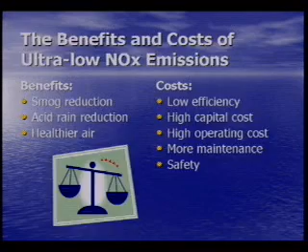We'd like to look at some general categories of the types of ultra-low emission burner systems that are available today. The first are massive FGR burners. What we mean by that is these systems recirculate a very high percentage of the stack gas back through the combustion zone in an attempt to control NOx.

The second major category we're going to look at are matrix burners. These are burners where the fuel and air is premixed at one point and fed through usually a long cylindrical porous matrix material.

The next one we want to look at is post-combustion treatment, which does not involve burner design, but merely is taking care of or eliminating NOx that's already been created on the back end of a boiler system.

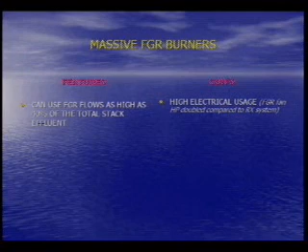One other drawback of recirculating high amounts of FGR is that the flame tends to become rather translucent when you're recirculating these products of combustion back through the flame. The translucency can create a couple of problems. One, it reduces your radiant heat transfer through the furnace into the boiler, and also it makes it a bit more difficult to use standard equipment for detecting the flame, because the radiant energy, particularly the ultraviolet energy, is diminished considerably.

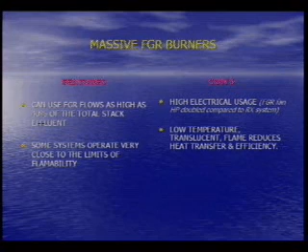Some of these systems that operate with large amounts of FGR will operate with staged combustion, and by that we mean you're burning a rich fuel-air mixture in one area and a lean fuel-air mixture in another area, which is fine. It's a good approach, but some of these systems that are trying to approach or have approached single-digit NOx emissions levels have run into some problems.

Other systems take a different approach, and rather than staging the combustion and operating very rich in some areas and very lean in other areas, they attempt to develop a near perfect mixing situation with the fuel and the air. The theory behind that is to avoid having any excess oxygen molecules exposed to the fuel.

Combustion instability has been a problem with these systems, particularly the staged combustion systems. When you're operating very close to the limits of flammability of the fuel, and then in addition you're adding FGR to slow down the combustion and lower the flame temperature, it's a very tricky concept, and things can go awry.

As a result, what these people have found is that it's been necessary to slow down what we term the modulating rate, which is the amount of time it takes to modulate the fuel input between the minimum and maximum values of the system.

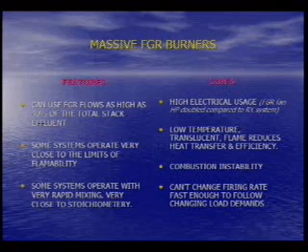The problem with that is the load demands on boilers obviously vary, and in fact the San Joaquin Air Quality Management District, last September when they came out with their new regulations, specifically relaxed requirements for load following boilers for this very reason, because these particular systems cannot change firing rate fast enough without getting unstable and unsafe. On these, now termed load following boilers, the emissions requirements have been relaxed somewhat.

Okay, a brief look at some of the pros and drawbacks of these porous matrix burners. As I mentioned, these types of systems pre-mix the fuel and air at one point, and then feed it through this matrix material.

There's several different types of materials. We say delicate and expensive because some of them are quite delicate. They're ceramic materials, and they can break quite easily, and they're not cheap at all. The purpose of these matrix materials is that there are little pores through them, and this fuel-air mixture is forced through these pores. The actual combustion takes place on the surface of this material.

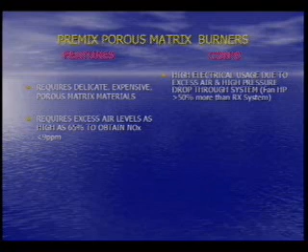And what's the drawback of all this? Well, here again, high electrical usage. You've got two problems here. If you're moving 65% more air than what's required for combustion, obviously your fan requirements are going to go up, and the horsepower requirement is going to increase considerably. And also you have to force this fuel-air mixture through these little pores in the matrix material, so the pressure requirements, and thusly the fan requirements, are increased as well.

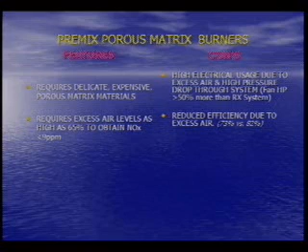We've run some tests on these types of systems, in fact at the same plant for this project. And what we found was that the efficiency of these porous matrix systems that were in operation in this plant was running at 73%, as opposed to the 82% for the equipment that we put in for this project. That's a 12% additional fuel requirement that the customer has to purchase and burn for the same amount of output on the boiler.

For this particular boiler involved in this project, which was 500 horsepower, at this plant which operates 24/7 at an average of about 60 to 65% of its maximum capacity over the last year, this difference in efficiency equates to more than $70,000 a year in fuel costs just for one boiler for this plant, and they've got 5 boilers. So a significant factor that we really want to address in this new technology.

Also, because this matrix material has these small pores, they can easily become contaminated and plugged with any particulate matter that's in the combustion air. Might not sound like such a drawback, but if you talk to customers who have to change many filters on their combustion air fans every week — and if you don't do it, you're going to have a real big problem — it is a maintenance problem.

Also, the durability of this matrix material is somewhat questionable. There are different types of materials. As I mentioned, there's some ceramic matrix materials. There's also some, I wouldn't say exotic, but stainless matrix materials that are available. But the lifespan of these things is limited, with the combustion taking place right on the surface of this material.

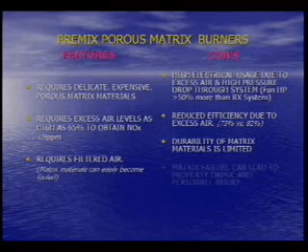Now, if this material does fail, it can present a real large safety issue, mainly because, once again, you're mixing the fuel and air at one point, and actually combusting it at a different place. In order for that system to work safely, the velocity of this fuel-air mixture being fed to the flame has to be higher than the rate of flame propagation coming back towards the mixing point. What happens is, if this matrix material fails, the velocity of the fuel-air mixture going towards the flame front drops drastically, and the flame front comes back to the mixing point. So that's one of the safety issues we wanted to address in this project.

Also, these types of systems have a rather limited turn-down ratio, turn-down being the ratio of the maximum input of the system to the minimum input. Typically 3-to-1 is about all you get out of one of these porous matrix systems. In the testing we did, we were able to get a 5.5-to-1 turn down, a little bit less than our goal, and we feel there were some problems associated with this specific installation which led to that. We were actually shooting for 6-to-1, and we believe that can very easily be done with a few minor changes in that installation, or in future installations, I should say.

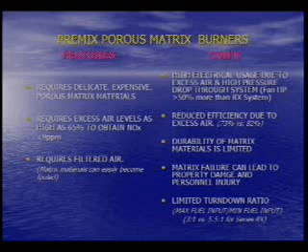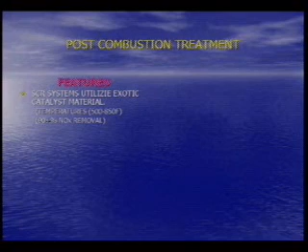SNCR systems, selective non-catalytic reduction. No catalyst, but still a chemical injection. These operate at much higher temperatures. They're not nearly as efficient at removing NOx. And I'd like to note that this 50% removal rate shown here is

only if you can withstand a relatively high amount of what's called ammonia slip or chemical slip. That would be the chemical that's being injected to reduce the NOx not being controlled properly or not mixed properly with the effluent, so you get what they call slippage, and a certain percentage of this chemical goes up the stack along with the flue gas.

Now, some of these systems, if you need to limit your ammonia slip to several parts per million, may only be closer to 30% effective at NOx removal.

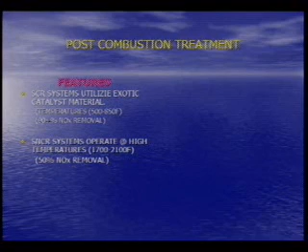Some of the chemicals that can be used: ammonia is the most common, sodium hydroxide or urea, or a couple of others that you can run into.

Now, what we feel are some of the drawbacks here. The biggest one is the cost. Extremely expensive systems, very, very expensive. Not only for the equipment itself, but the constant operation and cost of the chemicals, et cetera, particularly if there's a catalyst involved, which has a limited lifetime.

Some of these things can also result in chemical waste streams, which need to be dealt with. Certainly would rather not have to deal with that if we can get away with it.

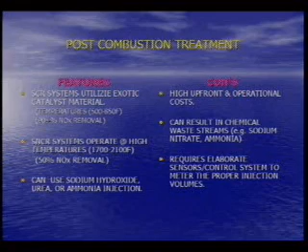Now, in order to control the exact amount of chemical that is injected into the flue gas, there's some rather elaborate sensors and control systems that are required to do this, and this is one of the reasons why the cost is extremely high on these systems.

So our goal in this project is to minimize these costs as much as we can and still maintain these benefits that we talked about a short time ago.

We want to increase the efficiency. We want to lower the cost to industry to make these benefits of low NOx a little bit more palatable as far as the cost is concerned.

We want to improve the reliability of the equipment, and that relates back to catalytic beds that need to be replaced, and matrix materials that may fail and need to be replaced.

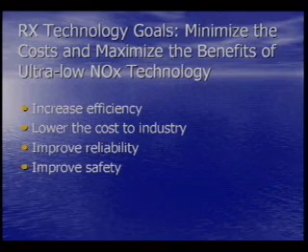And, of course, the safety, which we touched on earlier with the unstable combustion conditions and also with this matrix failure.

Now, on the efficiency side of things, what we found is that we could operate this new burner design optimally with 3% oxygen. We have actually operated at much less than that, down to 1.5% oxygen, but 3% is considered kind of optimal as far as industry is concerned, because you still have to deal with humidity changes, temperature changes, and whatnot, and operating down at 1.5 or 2% oxygen is cutting it a little too close.

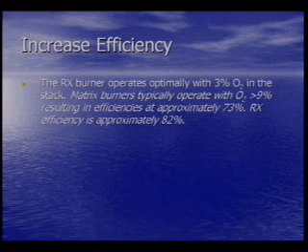But at any rate, we kind of touched on this efficiency thing before and what it can mean to industry. And here again, under these conditions at this host site, more than $70,000 a year just in one boiler to put up with this excess air that is required on some of these matrix burners.

One of our other goals in this project was not just to reduce NOx that we had already made, but to greatly reduce the production of it in the first place, rather than just putting a Band-Aid on the back end. By producing less in the first place, it makes it a lot easier for us to get the final result down even lower at a lower cost.

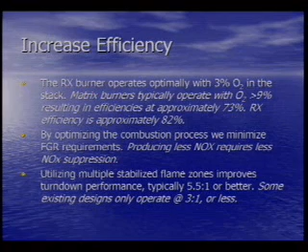Now, we're going to take a look at just exactly what this looks like mechanically in a little bit more detail here, but it involves some multiple flame zones. We are actually operating with 5 different flames in what we call 3 different combustion zones in the system, which we feel gives us a lot more stability and gives us this higher turn down ratio.

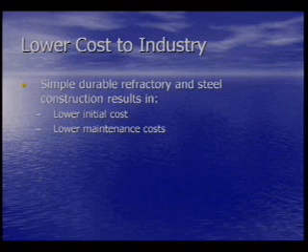And also eliminating, what we're going to get into in a little bit here, the formation rather than just dealing with thermal NOx, which most systems deal with. We felt we could lower the cost to industry on these systems by getting away from some of these exotic and very expensive materials, and of course any chemicals that are required for post-combustion treatment.

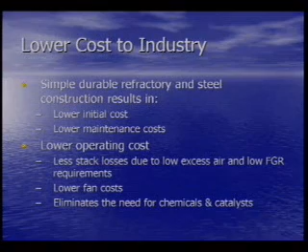Also, the operating costs - we talked about the stack losses. This relates back to the amount of excess air and the O2 levels in the stack, 9% as opposed to 3%, which is considerably more expensive to operate with all this excess air. And also the electrical costs to operate with very high FGR rates on these massive FGR burners.

Now we're going to take a look at some numbers here. These were put together by Altex Technologies several years ago, which represent the cost to remove 1 ton of NOx. This is for initial equipment cost and operating costs over a 10-year period. And as you can see, way up on top, post-combustion treatment is just extremely expensive, almost 100 times as much as what we feel we're going to be able to do this at.

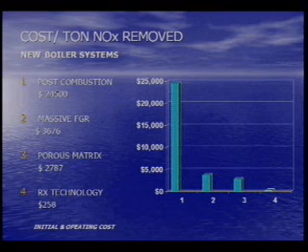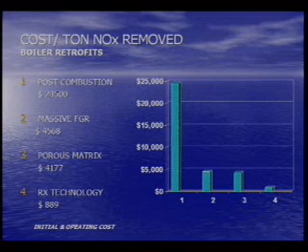Now, I want to point out this is for new boiler systems. The costs do change a little bit on retrofits. It doesn't change for post-combustion treatment because you're not changing anything to the burner system itself, but on retrofits with massive FGR, porous matrix, and our technology, you have to spend some money to get rid of the old system and install the new system. So there is a little bit higher cost involved here on the retrofits.

We started this project quite some time ago - it was actually October of 2002, which is when we had the initial meeting with California Dairies, the host site. And then, of course, there was a certain amount of time after that for design and production. But this equipment has been in and running now for a little over 11 months. Other than having one failure - right up front, after about 1 day, we discovered we needed to redesign a certain component in the system, but we got that changed rather quickly - other than that, there's been no durability problems whatsoever on the equipment.

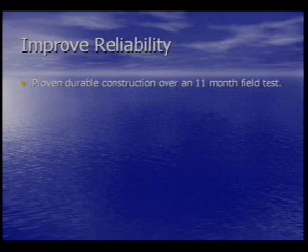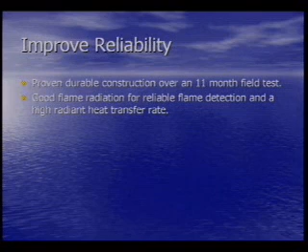We talked about this flame radiation and how some of these systems can reduce this radiation, and the flame can get rather translucent. We touched on what effect that has on the radiant heat transfer rate through the furnace wall and into the boiler. But also this translucent flame problem causes issues with using standard flame detection equipment. So this is another advantage that we felt we were going to be able to offer. We don't have any small orifices such as there are in these porous matrix burners, so we don't have to worry about combustion air issues. Again, no ceramic fiber or metallic material that's involved in these porous matrix burners, or, of course, catalyst materials in the post-combustion treatment.

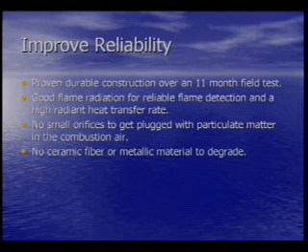Now, safety issues. Flame stability, I think, is the biggest asset that we have to offer here. We're not operating on the ragged edge of flammability, so if something changes a little bit - maybe some linkage slips, or the temperature changes drastically, or the humidity changes drastically, and at the same time you're trying to change firing rate - there's been many problems involved along these areas. Flame retention, we haven't had any flame retention problems. Flame retention is really anchoring the base of the flame onto the face of the burner so that it's not floating around in places where you don't want it.

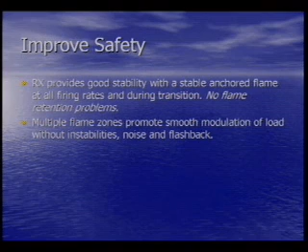As I mentioned, we've got 5 different flame zones, and we feel that this really helps us with this stability issue, and also helps us on the turn down, the noise, and the lack of any instabilities on the flame front.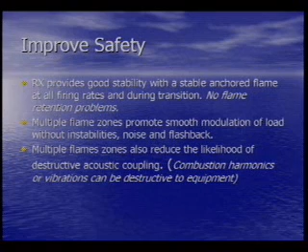And this acoustic coupling is something that can be a problem on some of these burners, particularly if you're trying to approach a perfect mix with the fuel and the air, as we looked at with the massive FGR burners. This acoustic coupling - you could think of it as standing sound waves in a furnace - and under certain conditions, if the geometry of the furnace is correct, these waves of a certain frequency will actually create combustion harmonics, which is very annoying to anyone who's around, but can also actually get a boiler jumping around off the ground, and can be very destructive. But we have had no problems with this combustion harmonics.

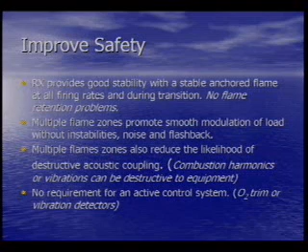Now, in this control system, some of these burners that have been known to be unstable have had their manufacturers go to what we call active control systems, whereby they're monitoring the O2 in the flue gas, which is fine, but it's even more expense, and it's even an additional maintenance problem, because these O2 sensors typically foul quite easily. Some jobs we have seen even have had vibration sensors installed on the burner system, so if they do get too unstable, they'll shut the system down. Well, certainly not the best situation for industry.

Okay, so we want to go into how is it that we're going to go about reducing or getting rid of some of these costs that industry has been bearing. I'm not sure this has been totally documented, but it's read in numerous places that the feeling is there's over 200 reactions involving more than 20 different species during the combustion process, and it is a rather complicated thing. But our thoughts and our goals were to utilize some of these intermediate reactions that take place in a certain portion of the flame and in a controlled manner, and utilize them to our advantage in the formation of NOx in the first place, rather than just trying to get rid of it after it was formed.

Now, some of the things that we were looking for to take advantage of partially oxidized fuel. CHI standing for CH1 or CH2, CH3, partially oxidized hydrocarbons. CO and soot. And it may seem a little odd that a burner manufacturer would actually want to intentionally produce some of these items like CO and soot, but we're not going to get too much into chemistry, but we're going to attempt to show briefly how these things can be put to use to our advantage.

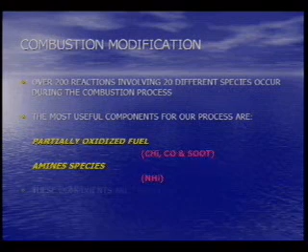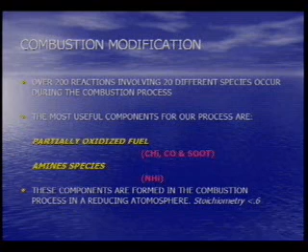Now, these components that we are looking for are formed in a reducing atmosphere. And when we get into looking at the equipment itself, we're going to see just exactly where this reducing atmosphere is and how we go about controlling these items that we're looking for. Just put a little note here that reducing atmosphere, what we're looking for is a stoichiometry of less than 0.6, which is a fairly rich mixture, but certainly not uncontrollable and not close enough to the limits of flammability to cause any instability problems.

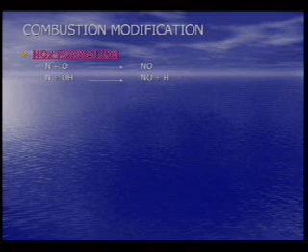Okay, brief look at two of the real basic equations of NOx formation. Of course, there's many other complicated ones, but just wanted to review that real briefly, but we want to spend more time on the reduction part.

One thing we're looking at here, partially burned hydrocarbons. Now, I put a note on here, reversible, and this is true because the presence of this hydrogen cyanide actually can go back the other way and produce NOx under certain circumstances. And we're going to take a look at those circumstances. But here's another reversible situation involving hydrogen cyanide, and depending upon the environment, this reaction can be driven one way or the other. Carbon, this is our friend the soot that we mentioned before that most burner manufacturers don't want to make, but we do in certain controlled circumstances.

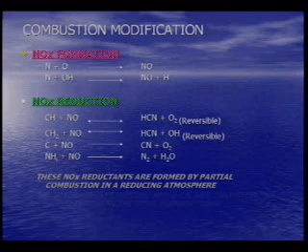Another reducing agent for NOx, and then the amines that we talked about, mainly ammonia, but the NH1, NH2 do come into play also. Now, I mentioned that under certain circumstances, these things are good, and those circumstances, once again, are in this reducing atmosphere that we are going to create in part of our burner system. Now, some of these other nasty players here, like the hydrogen cyanide and cyanide and whatnot, these things in what we call the final burnout zone are actually converted back to molecular nitrogen, CO2, and water, which are nice things to have compared to some of the other things we could end up with.

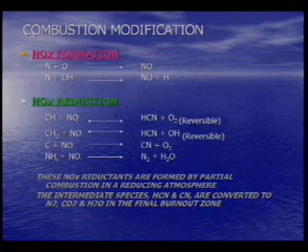I'd like to touch on prompt NOx real briefly here. It's a term given to those NOx molecules which are formed very early in the combustion process. And in fact, it's commonly believed that almost all prompt NOx is formed in less than a millisecond after the combustion process takes place. Low NOx burners up to this point typically haven't dealt too much with prompt NOx, and it's something you can't deal with after the fact. You have to deal with it up front. Another little fact about prompt NOx as opposed to thermal NOx is that prompt NOx is not affected by flame temperature very much, whereas thermal NOx is affected greatly by flame temperature.

Now, we mentioned these reversible reactions before, partially oxidized hydrocarbons and these hydrogen cyanides and whatnot. These can actually, and these are some of the intermediate species that are formed in the very early stages of combustion and can, in the presence of oxygen, actually contribute to the formation of prompt NOx. However, what we're looking for is a reducing atmosphere.

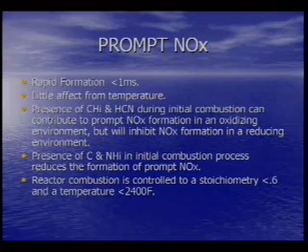So in a reducing atmosphere, this is when we can reverse that reaction and actually use these things to our advantage to reduce NOx. Once again, we're in this rich portion of the burner in what we call a reactor, trying to keep the stoichiometry less than 0.6 and the temperatures below 2400 Fahrenheit. These seem to be ideal conditions for the formation of some of these intermediate species, the amines and the cyanamides and whatnot that we are actually looking for to prevent the formation of prompt NOx.

Now, I'm not a chemist, and I don't intend to dwell on this too much, but I did want to take a look at some of these chemical reactions going on here that we're looking for. We start over here with NOx in the upper left-hand corner. NO and NO2 can be freely exchanged back and forth depending upon the environment. Sometimes one is more happy than the other.

It's been our experience that NO2 is a very, very small percentage of NOx formed in combustion unless you've got very high O2 or excess air conditions, and lower temperatures seem to be a factor in creating a higher percentage of NO2. If we look over here, we've got our partially oxidized hydrocarbons, which gives us hydrogen cyanides, and also in the presence of carbon, which is the soot we were looking for, and in the presence of some water vapor, which we've got in the combustion process, leading us all back over to what we're really looking for, which is molecular nitrogen.

And also we've got our amine species here, which reacts with the NOx to form the molecular nitrogen. Okay, so how are we going to go about all of this?

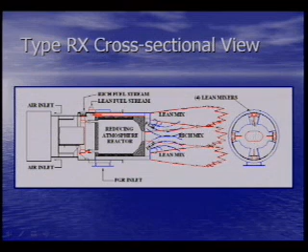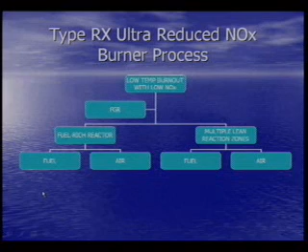The exit velocities on all 5 of these jets are rather critical. Just to show briefly in graphical form, we're bringing in our rich fuel with some air, and we're partially combusting it inside of this reactor. Then we're bringing in our air and what we call our lean fuel, mixing it in 4 different places around the perimeter of that. Then we're bringing it all together into this final burnout zone downstream.

For this particular project and under certain circumstances, we may or may not want to bring in some FGR and also blend that into the final burnout zone.

Now this rich reactor, it's producing this CO and soot, and there is some NOx, yes, there's some hydrogen, and some of these nitrogenous reducing species, which would be the ammonia, or NH2, NH1, and so on.

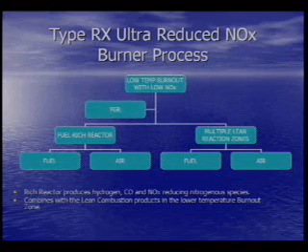After all of these intermediate species leave the reactor, then we combine them with these products of combustion from the 4 lean mixers and blend everything together in a certain manner and time frame so that we can get the results we want, which would be stable combustion, no CO problems, and very low NOx emissions.

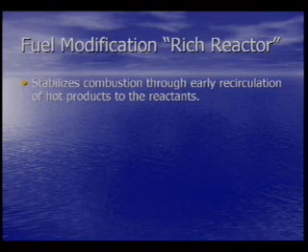Now, if we look at the reactor itself, I mentioned that port's design, we went into that a little bit, but also the exit velocity of the combustion products out through that port is rather important. The exit velocity is quite high intentionally so that it will create recirculation zones in the furnace. Actually, if you think of a flue-gas recirculation system, it's essentially a flue-gas recirculation system within the furnace itself, as opposed to bringing it out from the stack and back through the burner. We do look for this recirculation of hot products back into the reactants.

We kind of touched on controlling the production of this prompt NOx by creating some of these nasty players that fortunately we're able to convert back to molecular nitrogen back out in the final burnout zone. Once again, those are some of the species that we're trying to create in the rich reactor.

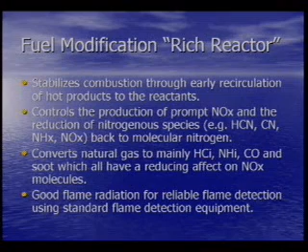This flame is highly radiant, which is good for heat transfer, as we touched on before. It was actually one of the drawbacks of certain other types of low NOx burners, and also so we can utilize standard flame detection equipment, keep the cost down. So this is one other thing that we were looking for and were successful in obtaining.

If we look at some points about these four lean zones around the perimeter, these are very lean premix flames. Premix meaning we're mixing the fuel and air and then burning it. We call it near premix because there isn't too much distance between the point where we're mixing and burning, but nonetheless it is a premix flame. Lean premix flames produce very, very little NOx. Thermal NOx production is low, and prompt NOx formation is also very low. So these are some qualities we were looking for.

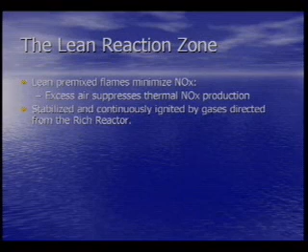Now these particular flames, or the discharge on the mixers themselves, are designed for a very high velocity laminar flow, as laminar as we can get it. There could be some design problems with that as far as flame retention is concerned. We talked about this rate of flame propagation and the rate at which you feed the fuel-air mixture. If it's too slow, you can have a safety problem. If it's too fast, the flame front's going to want to move off of the burner.

But we took care of that by directing a very small percentage of these gases from within the rich reactor towards the discharge of the lean mixers, which provides a continuous source of ignition. So that flame front is anchored, and it's one of the other factors in our ability to obtain a very stable flame front.

The excess air that's available from these four lean flame zones is actually what we use for the final CO burnout from the products of combustion coming out of the rich reactor.

Now these lean flames also are very close to the walls of the furnace. We do that so we can get a rather high rate of quenching effect, cooling from the furnace wall, if you will, and this has not been a problem. With conventional burners, this can be a problem if your products of combustion get too close to the furnace wall too early in the flame. You usually end up with a CO problem, but we have very little CO or unburned hydrocarbons in these very lean flames.

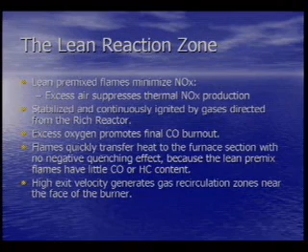Okay, here again we've got very high exit velocities coming out of these mixers, around 140 feet per second, which creates these recirculation zones of gases in the furnace, which we're using to temper the flame and bring its temperature down.

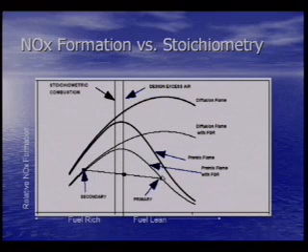If we look here briefly, this chart was scanned in from another project, so the text is a little fuzzy, but what we're looking at here is this premix flame, and also a premix flame with FGR. We can see here, over on the right-hand side where it says fuel lean, which is where we're operating, the NOx formation at this point is considerably less than at this point. Now over here on this side, this is actually what we're looking for within the rich reactor. We're operating over here on the left, on the fuel-rich side. So this is where we're operating within the rich reactor, and in the center, here's where we're operating with the four lean combustion zones around the perimeter.

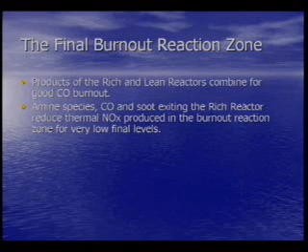Now the third important part, the final burnout zone. This is where we combine everything together, including the flue-gas recirculation, if we use it. This combines for good CO burnout. All of these intermediate species that we talked about before are exiting the rich reactor, which we were actually looking for to reduce the formation of prompt NOx. Some of these intermediate species are still present when we reach the final burnout zone, which we use to reduce thermal NOx.

The temperature of this burnout zone is relatively low, mainly due to the excess air from the lean flame zones. As mentioned previously, we like to control the temperature within the reactor to less than 2,400 degrees—typically around 2,300 seems ideal. Our flame temperatures are not that high to begin with, but we can go down further with the introduction of FGR in the final burnout zone.

Now, whether we use FGR or not, the critical factor here is how low you need to go with your NOx. Test results have indicated that without any flue gas recirculation at all, this system will develop no more than 17 or 18 parts per million of NOx. If you need to get down to single digits, we can add FGR. If you need to get down around the 5 or 6 ppm level, it requires about 25% recirculation.

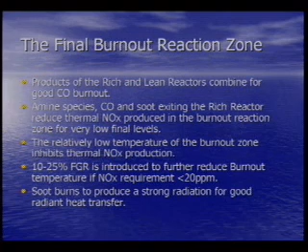Here again is this nasty soot that most people don't want to make, but we do. As this goes through its final burnout stage, we get most of our favorable radiation for heat transfer and also for flame scanning. So the result of all of this: 17 or 18 parts per million without any FGR, or 15 to 25% FGR depending upon what requirements you need to meet in your locality.

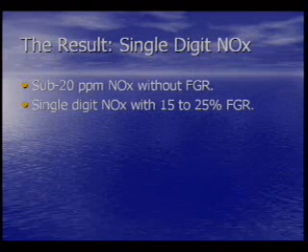This particular project was mainly geared towards fire tube boilers. There has been some laboratory testing done applying this technology and burner design to water tube boilers, and it looks very encouraging.

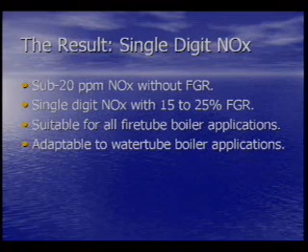These servo motors, and in fact the whole combustion control system, are controlled by a microprocessor-based system. It's closed loop with total feedback on everything, so we can monitor the position of all of these valves—not just the two fuel valves, but also one channel for combustion air and one channel for flue gas recirculation.

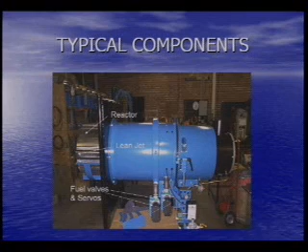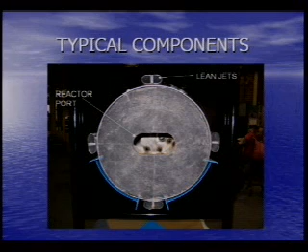This is a look at the business end of what we've got here, and you can see this funny shaped exit port on the reactor, which we went through the purpose of.

You can barely see some of the rich mixers here, which deliver the fuel-air mixture into the rich reactor. And we can see our lean fuel jets here, which are at 12, 3, 6, and 9 o'clock. Then a few other items: flame scanner, pilot, et cetera. All of these components are removable if need be.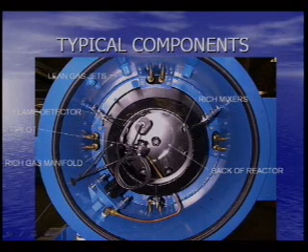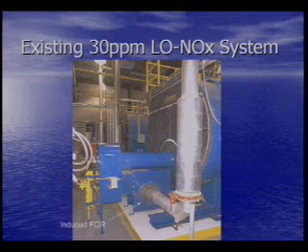When it was installed, the NOx limitations in the San Joaquin Valley at that time were 30 ppm for this size boiler. That is no longer the case—9 ppm is the max now. But on the last source test taken on this equipment before we took it out, these were our benchmark numbers, shown here in the middle of this chart.

These were taken by a third-party source test. You see the NOx here at 25.3, CO fairly high at 70.2, and stack O2 fairly high at 6.2. Now here's what we were shooting for: 5 to 6 parts per million on the NOx, less than 50 on the CO, and we also wanted to get this O2 down into the 3% range.

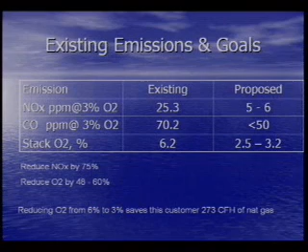Bottom line is we wanted to try and reduce the NOx by 75% and the O2 by roughly 50%. Here again, what's the advantage of reducing the O2? It goes back to how much gas this customer can save simply by getting rid of this excess air that's not required for combustion.

Here's a picture of our equipment when it was installed. This one did utilize flue-gas recirculation, coming down this pipe here, and we used forced recirculation on this job with this fan.

There has been some laboratory tests done with induced FGR as opposed to forced FGR. I mentioned earlier that to get down to the 5-6 ppm levels, 25% of FGR is required, and that is on forced FGR systems. Induced FGR systems only require 15% FGR to get down to these 5 to 6 ppm levels.

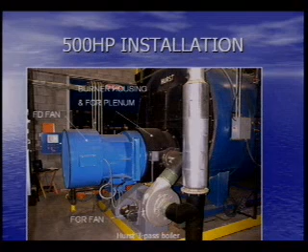Here's an actual photograph that was taken from the downstream end of the furnace, and you can see the high degree of radiance that we're getting from this flame out of the rich reactor. It's really kind of an eerie sight. Looks like something you'd see on the Sci-Fi Channel even.

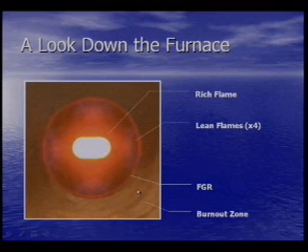But around the perimeter, you might be able to pick up this little bit of lighter blue color here, which is those real lean premix flames. We're introducing the FGR in 4 locations around here and here and here and here. And then, of course, downstream from all of that is the final burnout zone.

O2s, I mentioned before, we were able to run actually less than 3% without any negative effect. Mainly, usually what will happen there is on a lot of burner systems is the CO levels will become intolerable. But at the higher firing rates, we had absolutely 0 CO.

You may recall our goal was less than 50, if I'm not mistaken. We were a little bit higher than that at minimum, and I think that was just due to one little quirk on this particular installation that we decided wasn't worth tearing all the equipment out and redoing it, but there was a little bit of excess flame impingement at low fire on the furnace, which we are 100% positive is causing this 75 ppm CO at low fire.

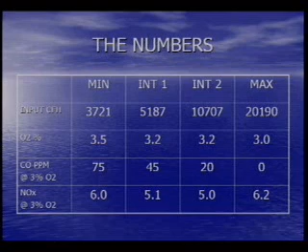The effect of FGR, mentioned before, over here on the left-hand side of the chart, we were looking at about 17 parts per million with no flue-gas recirculation at all. And we gradually blended more and more in until we got down to this area here where at some firing rates we were actually even a little bit lower than this 5 ppm as indicated by this graph here.

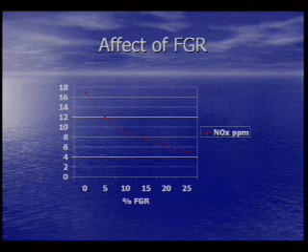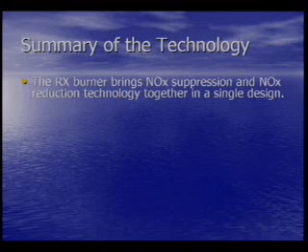So a little bit of summary of the technology. Our goal here really was to create some of these weird species, if you will, to try and eliminate the formation of NOx in the first place, as opposed to making it and then trying to get rid of it downstream. We feel we've been pretty successful in doing both, eliminating the formation up front and reducing what has been formed downstream.

We feel the combustion characteristics we got were, compared to other systems that are on the market now, extremely favorable, particularly the fact that we were able to modulate this system between the minimum firing rate and the maximum firing rate as fast as we wanted. The system didn't care. It had no signs of instability whatsoever.

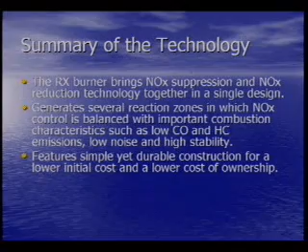Very low CO and unburned hydrocarbons emissions, also very favorable. The construction itself, probably couldn't tell just from looking at the photographs, but looking basically at some rolled steel, a little bit of stainless steel, and some refractory material used in the combustion industry forever.

So the cost for us to manufacture this equipment and supply it to industry is considerably less, and that's going to depend on the exact capacity of the equipment. But there's going to be some considerable savings for California industry on the initial cost of this equipment. Plus, we've also gotten rid of this need for ongoing cost as far as replacement matrix materials or replacement catalysts or the ongoing cost of chemical injection, et cetera, et cetera.

And main goal is single-digit NOx, because without single-digit NOx, we are kind of spinning our wheels. Well, so it all sounded fine and dandy, and we spent a considerable amount of time monitoring this thing. Any problems? Yeah, you betcha we had problems.

We had one very big problem recently, and it was a very embarrassing one. After 10 months of testing and testing and everything being fine, we didn't pass the source test. We failed the first source test. Couldn't believe it. As it turns out, there were actually a couple of reasons.

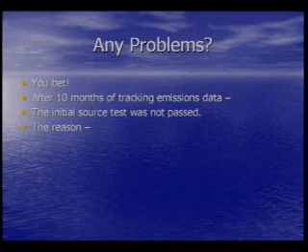The other problem we had was that these little servo motors, run by this microprocessor-based combustion control system, have feedback potentiometers on the drive shaft which send a signal back to the microprocessor saying, hey, you told us to be at this certain position, and I'm telling you I'm there. Well, it wasn't.

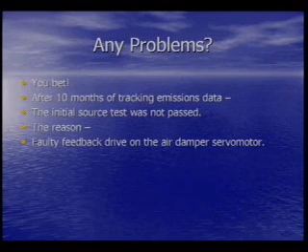So we had a faulty feedback on one of the drives, and as a result our O2 levels were changing - we had a lot of hysteresis in the air supply. Fortunately, we've pinpointed all these problems, and we managed to get the source test people and the district engineer back in there a few days later, so fortunately we got over that. But that was quite embarrassing after all this time and money.

So at any rate, we feel like we've met the goals of this project. Now, this $900,000 figure here wasn't just for this portion of the project - this is money that's been spent over the past 4 or 5 years in developing this technology from concept to now proving it in the field.

As far as laboratory tests are concerned, numerous sizes - 25, 100, 300 horsepower. This particular field test that this project was about was 500 horsepower. And we feel like we've really met all of the goals, and we feel like we're going to have a product here available for California industry.

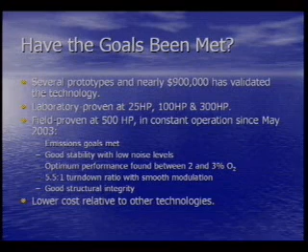It's going to make it a whole lot easier for them to meet some of these new regulations, particularly for example in the San Joaquin Valley. We just changed their regulations in September, and there's going to be an awful lot of industry that will have to replace equipment that's not that old. So this is going to make it a little bit more palatable for them.

The aftermath of all this - our company, ST Johnson, and Altex Technologies, the holder of the IP rights, have signed a 20-year licensing agreement not too long ago to utilize this technology in the production of commercial burner equipment.

And also, I mentioned I'd put both sub 15 and sub 9. Actually, our intentions are we can easily induce a little bit of FGR, just a couple of percent, for these systems that are only required to be sub 15. Those would be, for example in the San Joaquin Valley, systems less than 500 horsepower. 500 horsepower and above has to be sub 9, of course - there we would utilize this forced FGR.

Last January we were an exhibitor at the International Air Conditioning, Heating, Refrigeration Exposition down in Anaheim. We set up one of these systems and took it down there for a little show and tell, and we actually received honorable mention for most innovative product at the show - there were about 1,800 exhibitors with products, so we were pretty happy about that.